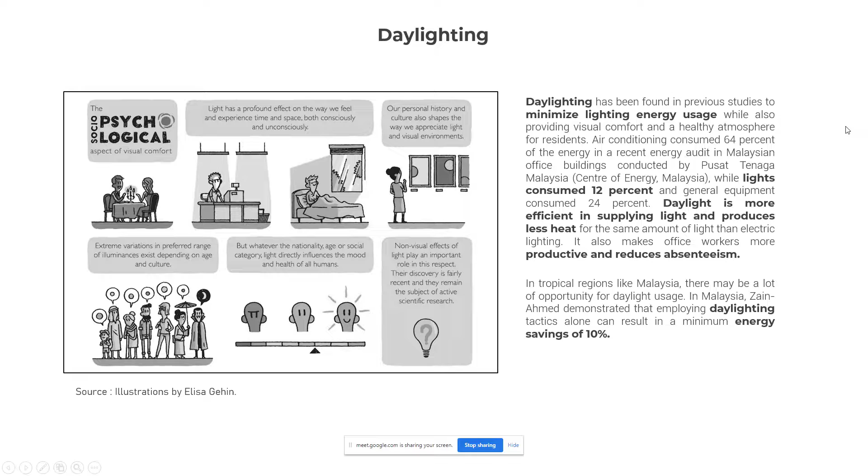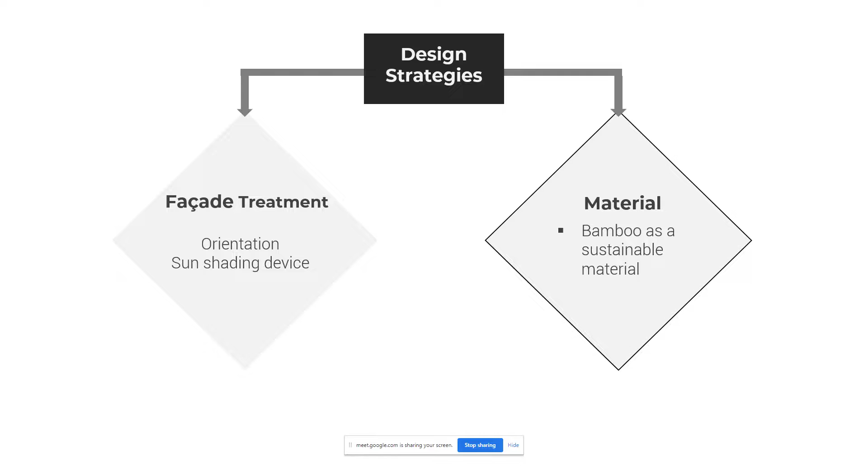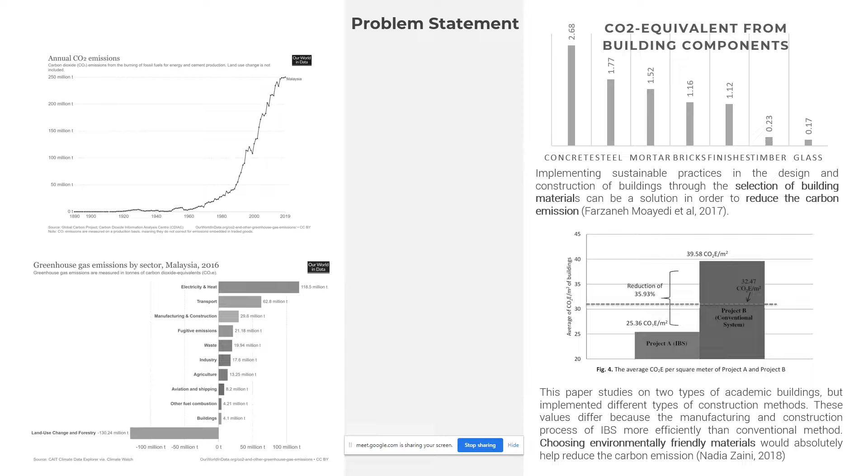So based on this CO2 equivalent component, selection of sustainable building material can be a solution to reduce carbon emission. So comes the question, why and how is bamboo considered sustainable? Well, bamboo is a grassy plant, which means the growth rate is incredibly fast; in only 3 to 5 years the bamboo will be fully mature and ready to be used. Bamboo also has the ability to regenerate itself, so when mature bamboo is harvested, young shoots sprout up to prepare for the new cycle.

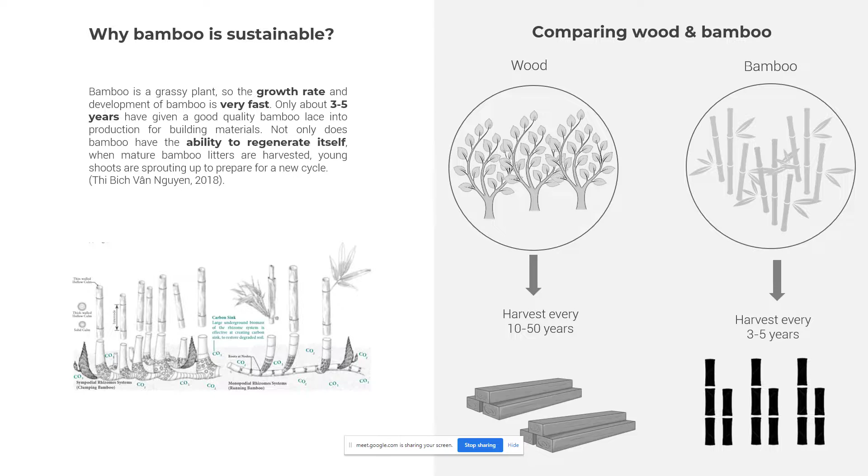Wood is also a natural material, so I'm comparing wood and bamboo. Wood or timber is harvested every 10 to 50 years depending on the species, whereas bamboo is harvested every 3 to 5 years. Another good thing about bamboo is that it is a grass that can sequester 17 times more carbon dioxide than a normal tree, produce 35% more oxygen than typical pine, and 1 hectare of bamboo absorbs about 17 tons of carbon per year.

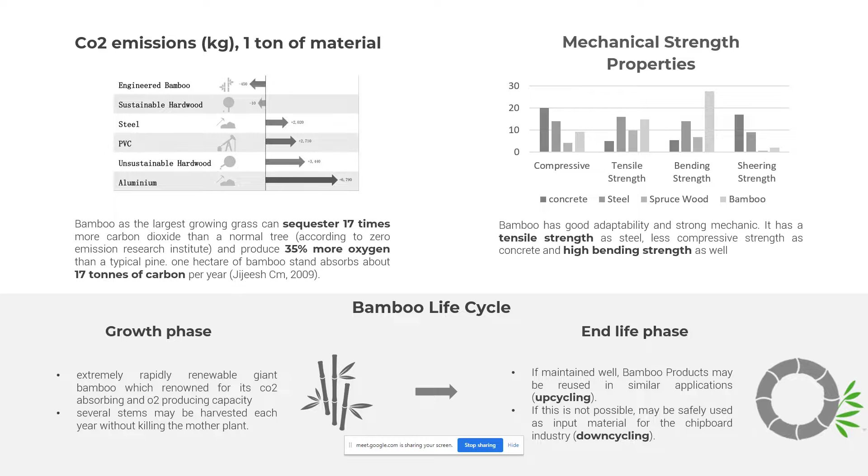Bamboo has good mechanical strength: it has tensile strength as high as steel, but less compressive strength than concrete, and a high bending strength as well. For the growth phase, like I explained earlier, it is renowned for its CO2 absorbing and O2 producing capacity. After it is harvested, the bamboo is cured to prolong the lifespan, and after that it will be ready to be used as building material. For the end of life phase, if maintained well, bamboo products may be reused in similar applications. If that is not possible, it can be used as an input material for the chipboard industry.

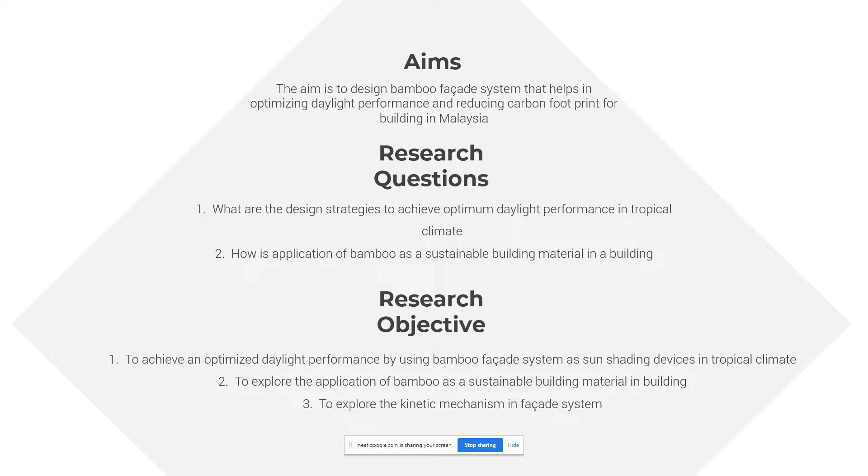So then I came up with my aim, which is to design a bamboo facade that helps in optimizing daylight performance and reducing carbon footprint for buildings in Malaysia. The objective is to achieve optimized daylight performance by using a bamboo facade system as a sun shading device in tropical climate, to explore the application of bamboo as a sustainable building material in a building, and to explore the kinetic mechanism in the facade system.

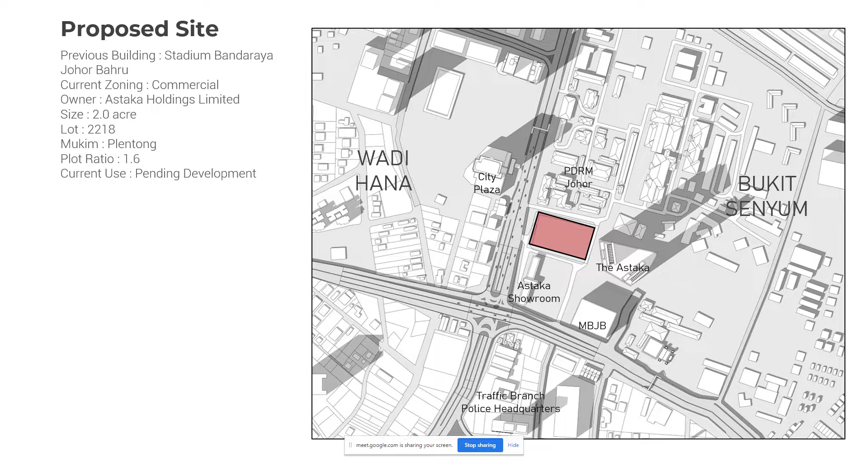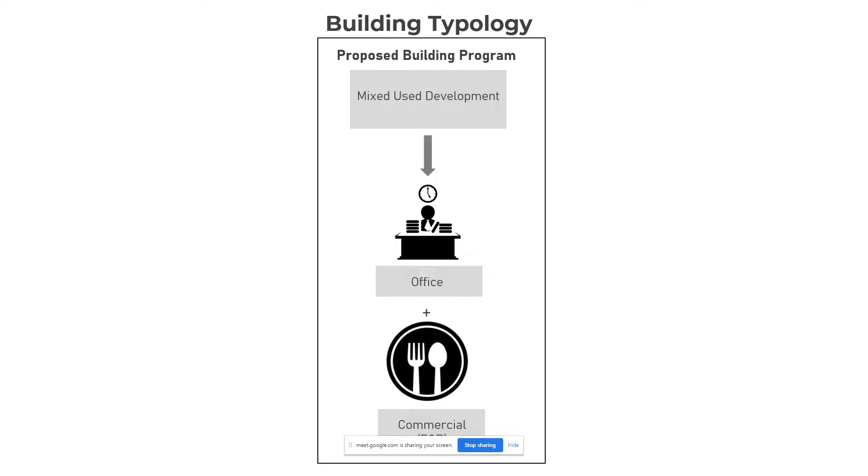Our site is located in Johor Bahru, beside the Astaka Tower, Astaka Condominium, which is the tallest building in Johor. For the building typology, the proposed building program is a mixed-use development, with an office tower and a commercial block, applying the fractal principle. So what is a fractal? A fractal is a natural phenomenon or mathematical set that exhibits a repeated pattern displayed at every scale. It may change in size or rotation, but the shape will remain the same.

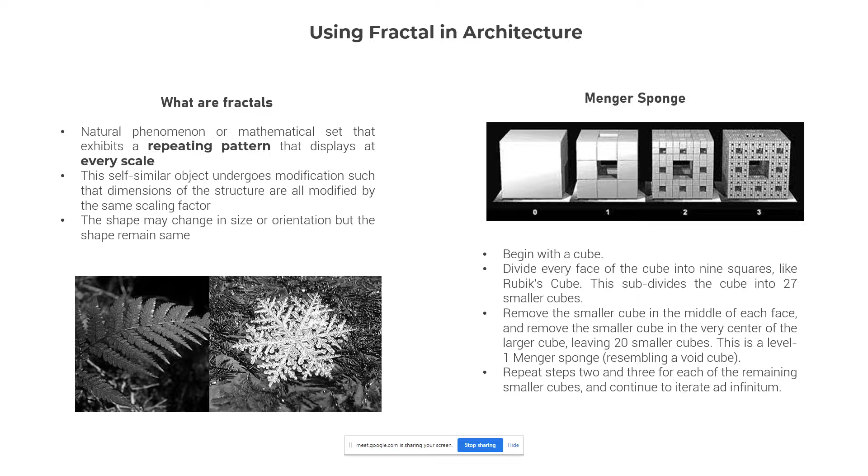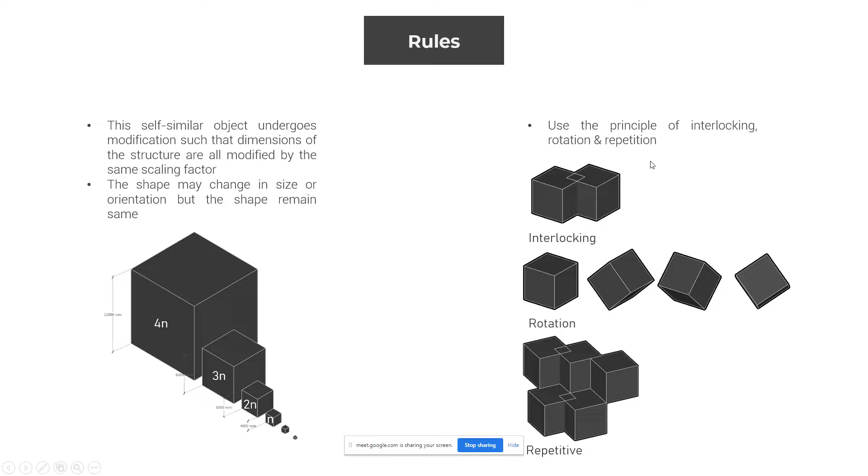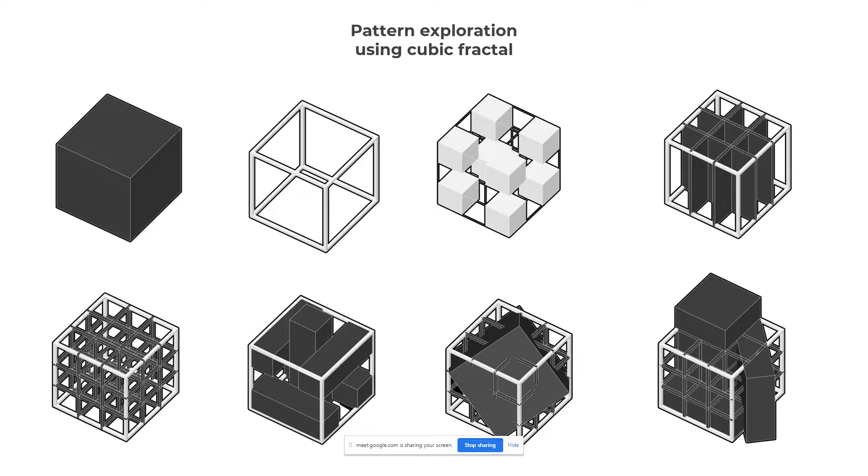So I am applying the fractal principle in my rules, using the cubic shape. It can change in size or rotation, but it will remain the cubic shape, using the principles of interlocking, rotation, and repetition. This is just a pattern exploration using cubic fractal. The simple cube can transform into various different forms.

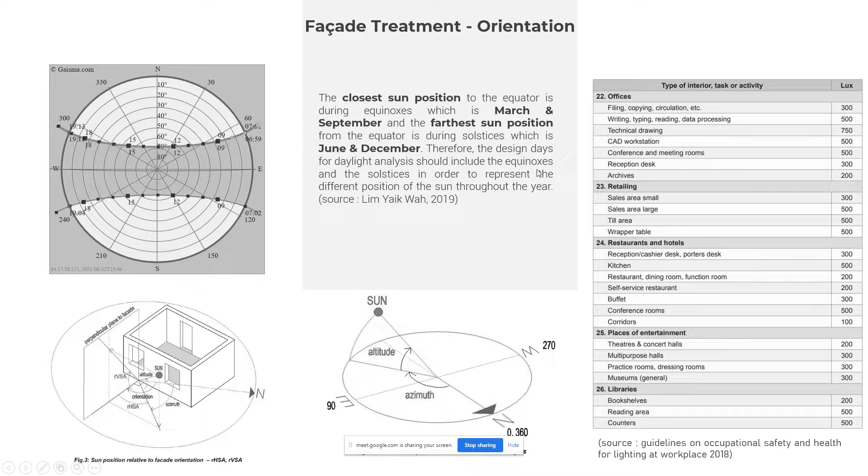Our design brief required us to tackle west and east sun. However, as you can see from the shadow study, the Astaka Tower actually shades the site during the morning, which means I will be focusing on tackling the west sun. This is the shadow study for March, June, and December at 4 p.m. As you can see, the azimuth angle changes from March, June, and December.

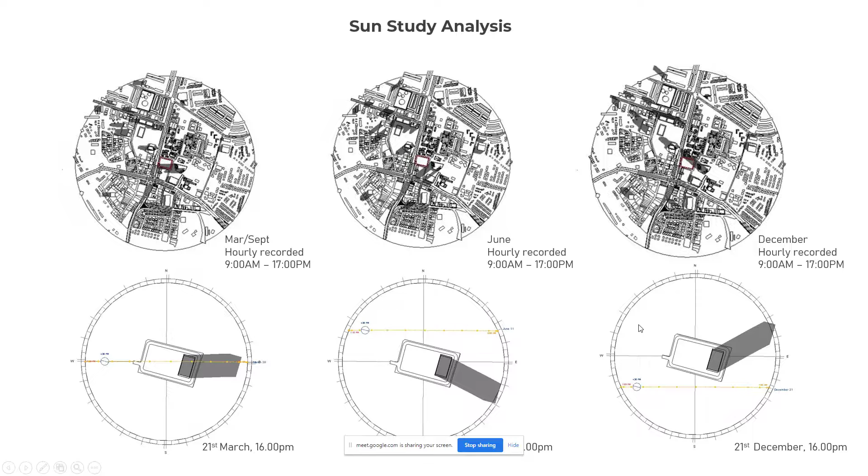Based on the analysis done, I propose the rotating facade. So the facade will rotate according to the azimuth angle, which means during March and September, the facade will rotate 45 degrees to the north. During June, it will rotate 45 degrees to the south, and during December, it will remain at 0 degrees.

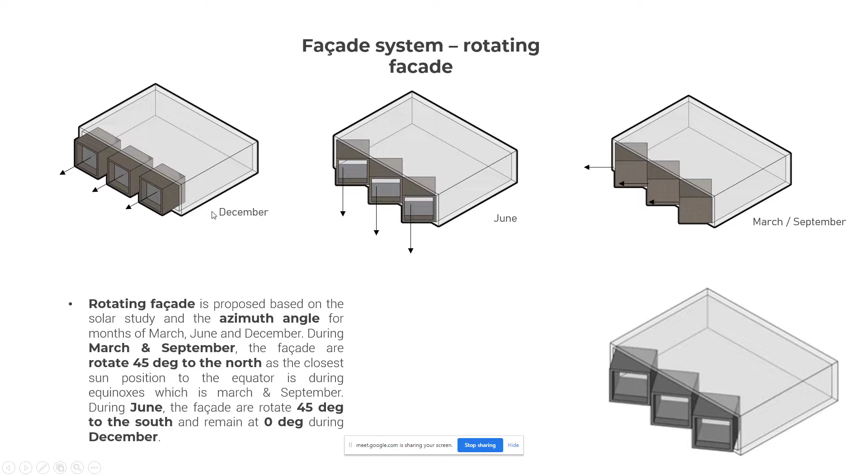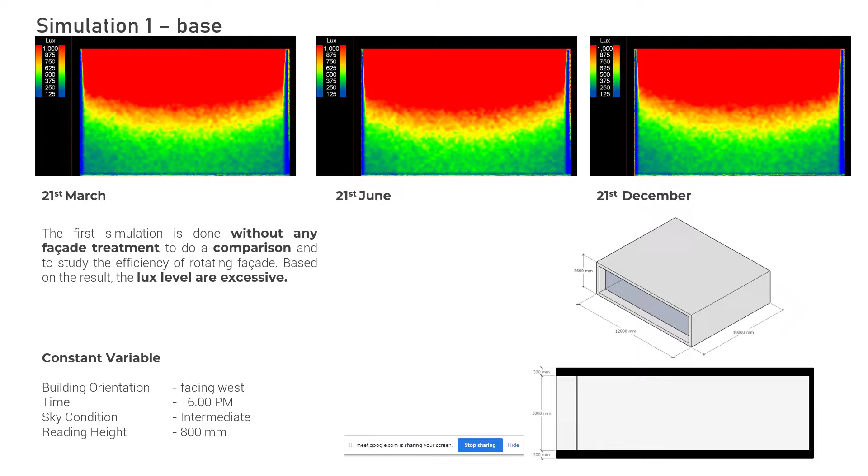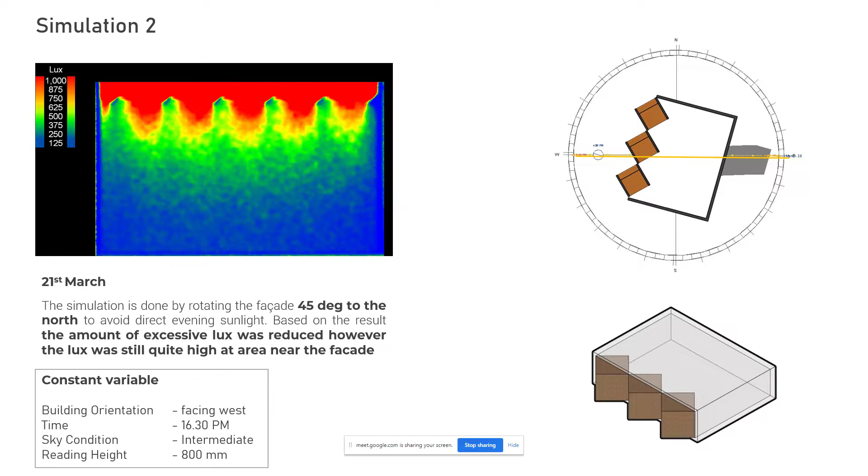So to study the efficiency of the rotating facade, the first simulation was done without any facade treatment to do the comparison study, and based on the result, the lux levels are excessive. The second simulation is done in March, where the facade is rotated 45 degrees to the north, and based on the result, the amount of excessive lux was reduced. However, the lux was still quite high in the area near the facade.

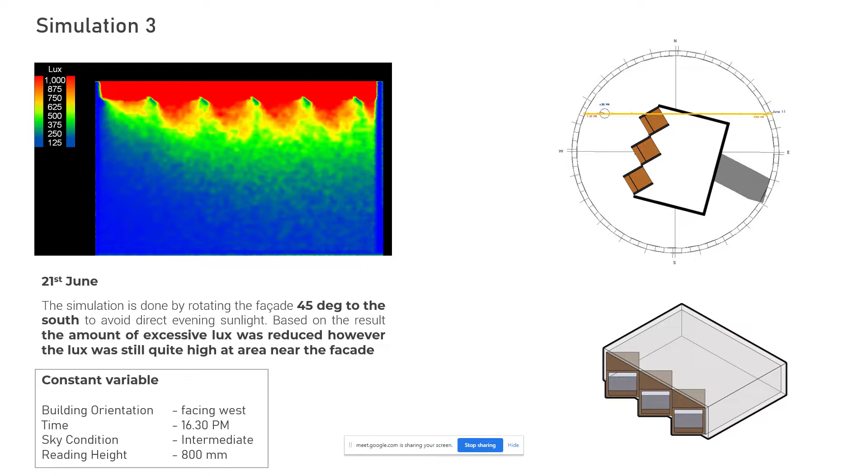So the third simulation was done in June. The facade rotated 45 degrees to the south, and it got the same result, which is the excessive lux was reduced, but the lux level is quite high in the area near the facade. The fourth simulation is during December, where the facade remains at 0 degrees, and it got the same result.

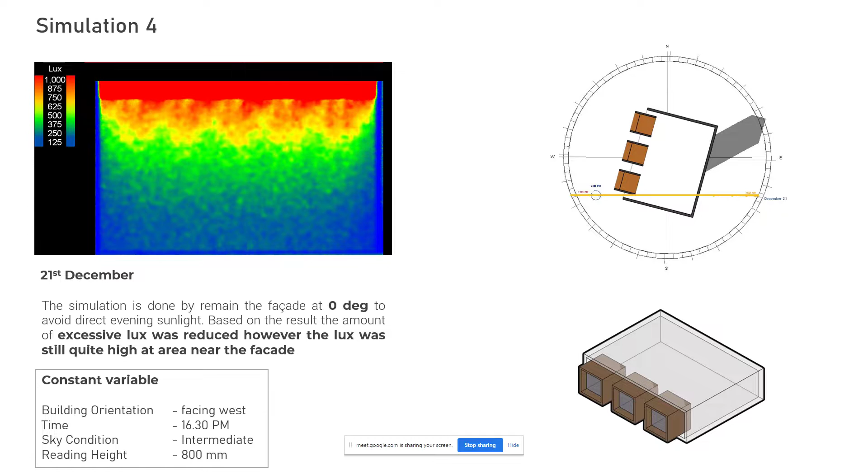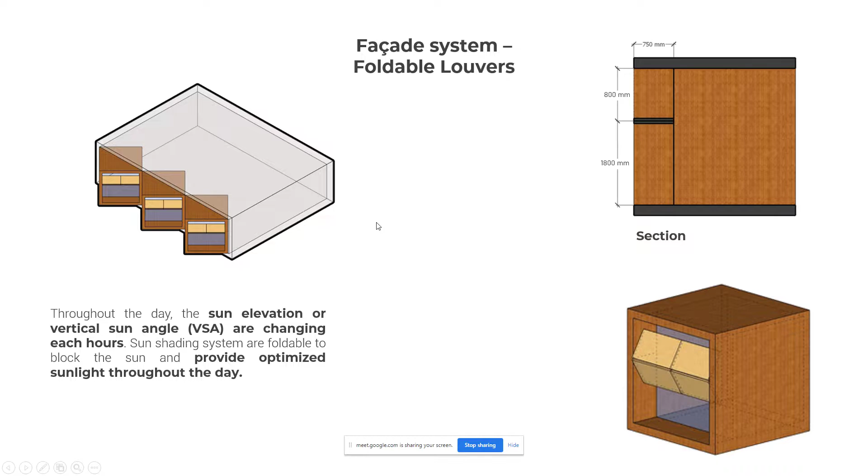The second facade system is foldable louvers to tackle the sun angle that changes throughout the day. The foldable facade functions to block the sun and provide optimized daylight performance. So this is the previous simulation result, to do a comparison with the facade with foldable louvers. The sixth simulation is done during March at 3 different hours, 9 a.m., 12 p.m. and 4 p.m., with different openings. Based on the result, the excessive lux level near the window is reduced.

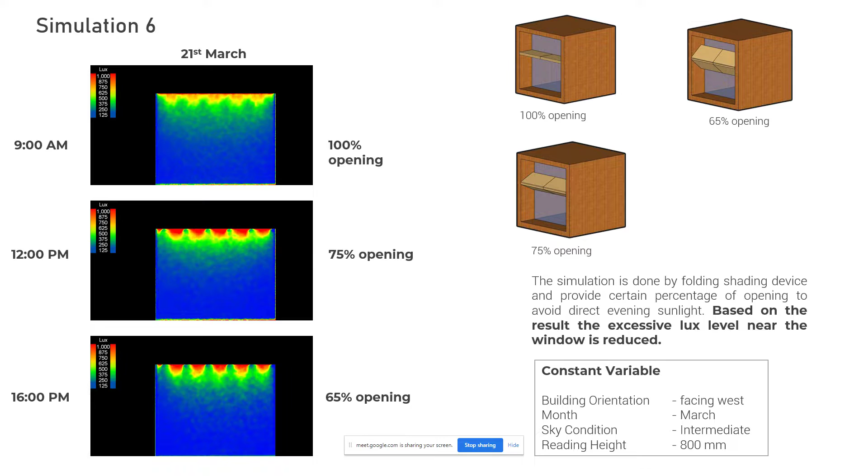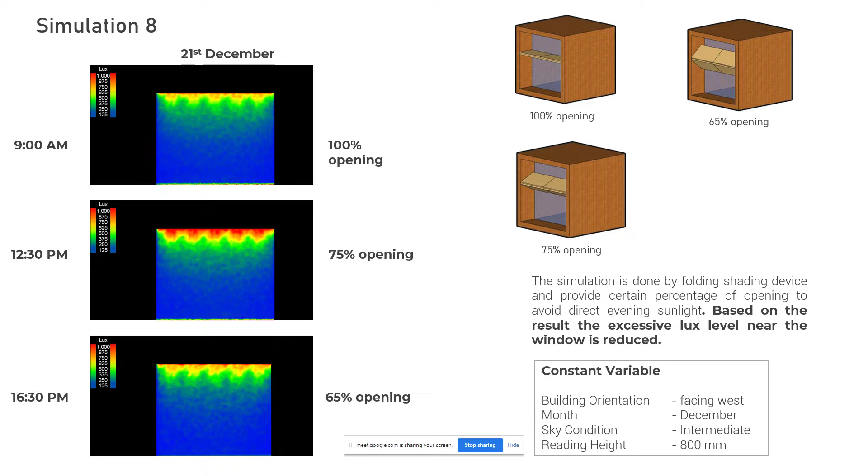The seventh simulation is done with the same method but during June and has the same result: the excessive lux level near the window is reduced. The eighth simulation is also done with the same method but during December and has the same result. And with that, I can conclude that the rotating facade combined with the foldable louvers provides an optimum daylight performance.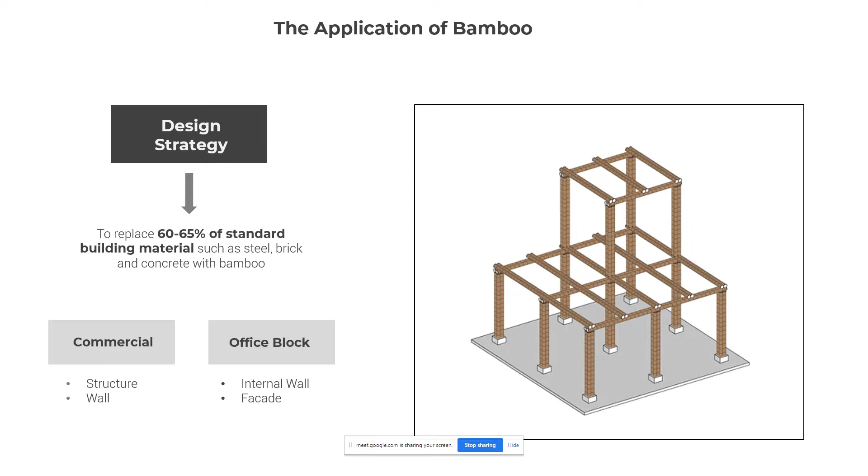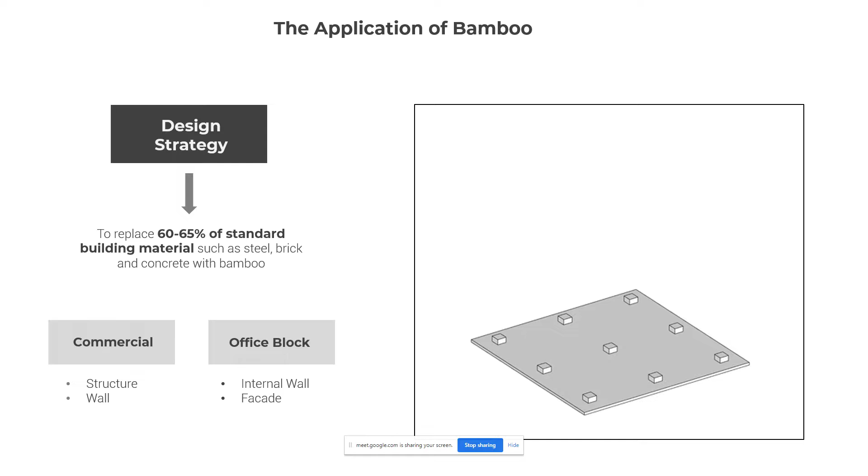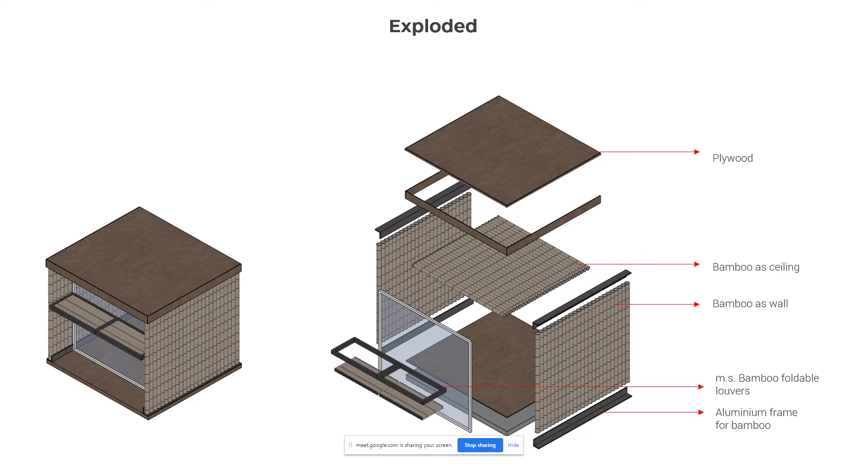So for the form making, the form started with an offset of 6.1 meters for road and buffer circulation, and then the commercial is placed on the west side, facing the main road to become the magnet for visitors, and the tower is placed on the east side. The middle is emptied out for a plaza for human activity and interaction. And then the commercial block is rotated 45 degrees to avoid the direct sunlight.

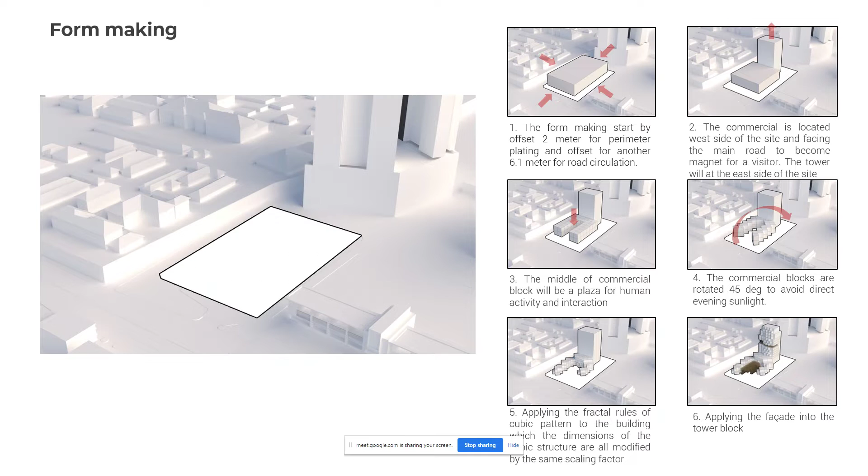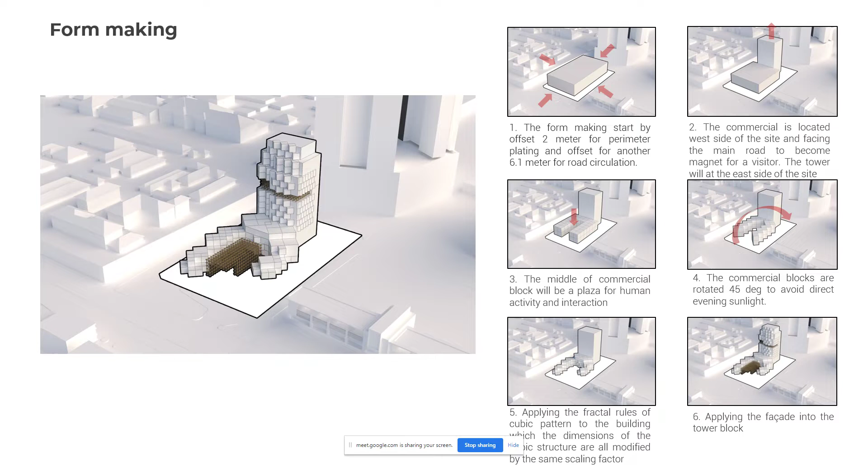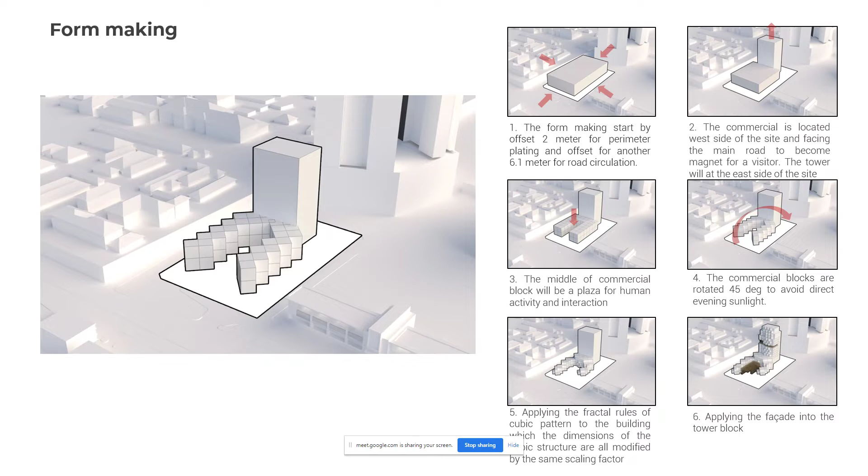And applying the fractal rules, the cubic structures are all modified by the same scaling factor. And then applying the facade to the tower block, and I put a bamboo structure roof on the plaza, which is to provide shade from rain and sun, and also to symbolize the bamboo structure as a bamboo sculpture.

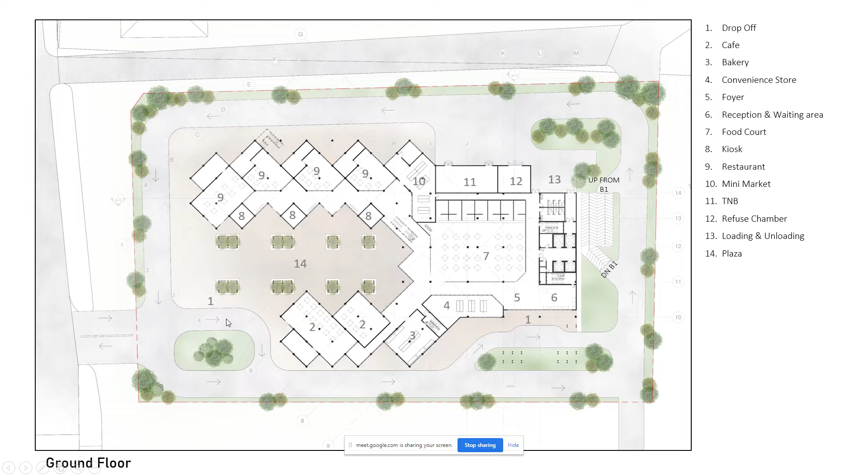So for the site plan, there will be one ingress and two egress. The first egress is here, another egress is over here. The program for the ground floor will be mainly F&B, proposing two drop-offs, one for the commercial area, another one for the office, and this area will be for services. Levels 1 and 2 will be mainly for retail.

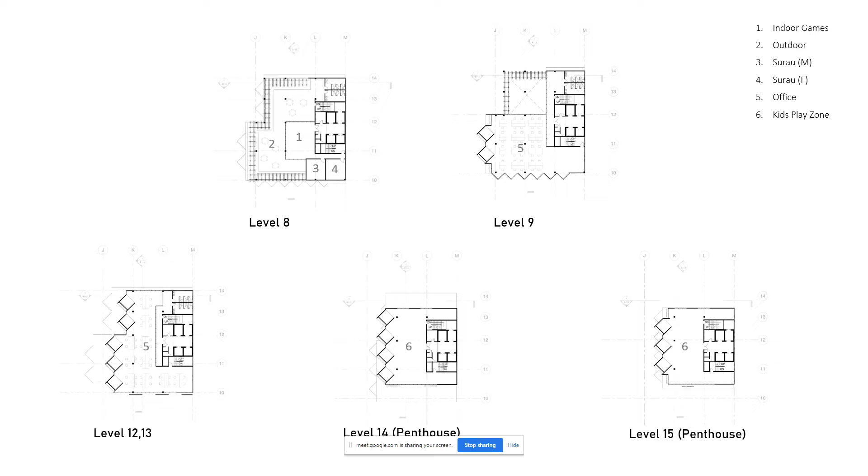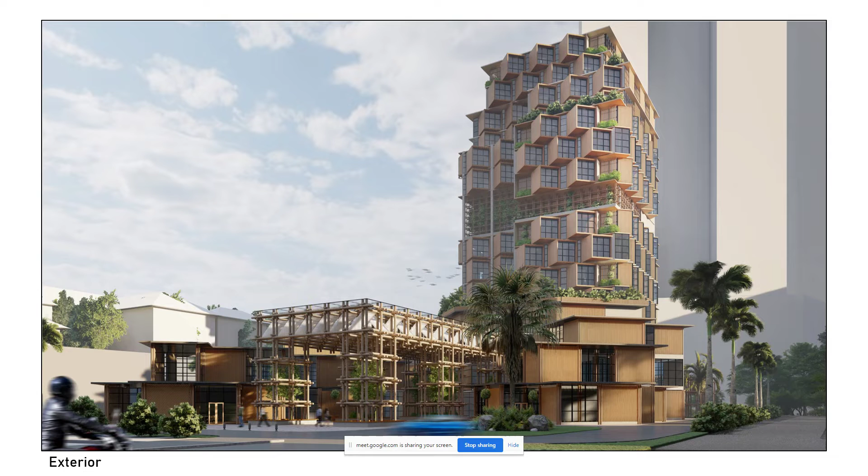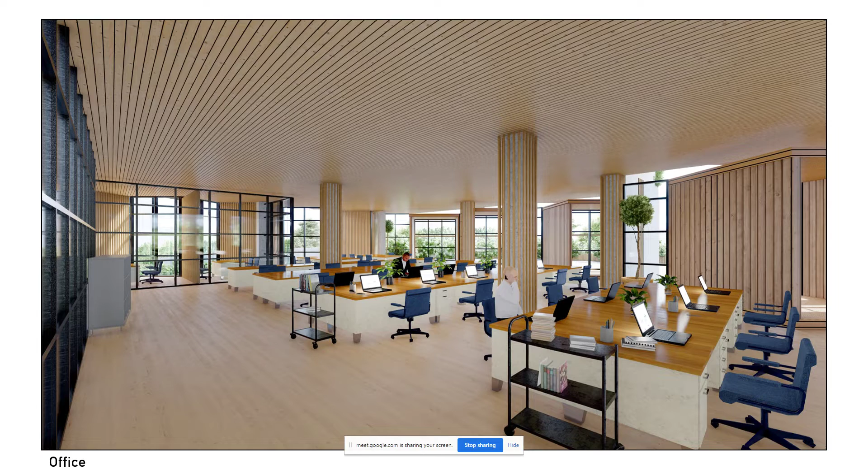For the conclusion, as the visual comfort in the office space does affect productivity, and employing daylight in the building is able to save energy, the kinetic bamboo facade system was proposed to tackle this. Based on the study, the rotating facade and foldable louvers successfully provide optimum daylight performance in the office space. And the application of bamboo as a material was proposed, as bamboo is known as a low carbon emission material. Nevertheless, proper calculation is needed to prove that the proposed building's carbon emission is reduced.

Thank you very much, and this is a walkthrough video.